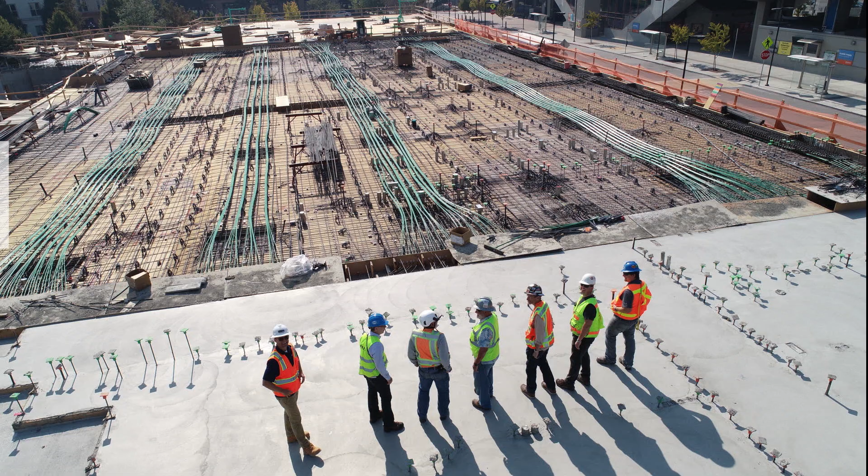So today we'll start out with a little bit of review as usual, but we'll review the general high-level concepts of quantity takeoff as we've talked before, and then we're going to dive into quantity development for pipe most specifically, and we'll talk a little more quickly, a little more high level about Softcraft and their basis. So they kind of tie back into everything in reality.

So review: the process of converting drawings, specs, and lists into quantities is also called quantity takeoff, material takeoff, which is the quantity development acronyms. The quantities represent material, but they also represent installation activities, and they very well may represent several activities at one time, as we talked about the sheetrock installation, the tape and float, the texture, and the paint. One quantity can represent all four of those activities.

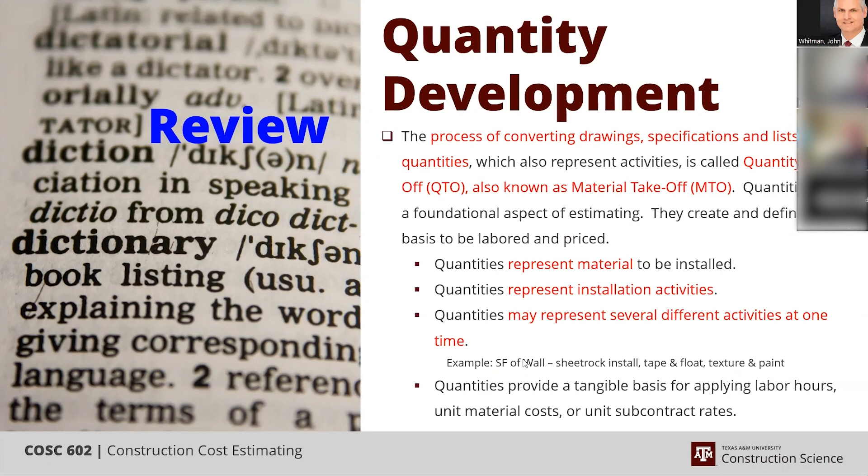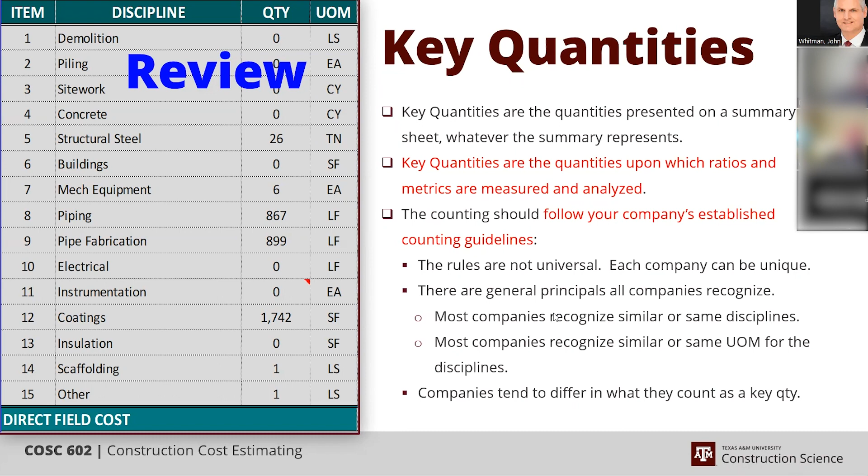Key quantities are not just the accumulation of the quantities, but they're specific quantities, and they're important to know, define, and follow because they establish the basis of ratios and metrics by which you measure and analyze your estimates at a high level. And it's important to know your company's guidelines because many companies vary in what their definition is.

Today, again, we're going to talk about piping, but that means piping, not tubing. Tubing is not included in the key quantity of piping.

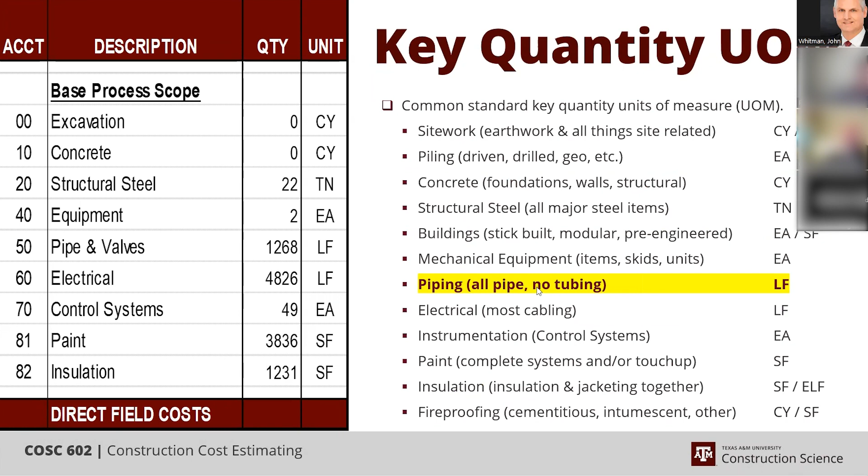Allowances. Now, we know that whenever we calculate our quantities off the drawings or pull it out of a model, those quantities are neat. They represent the actual intended final product, but we know that reality always changes that slightly. We've talked about it, forms bow, and we pull cable beyond the tie point and make sure there's slack in there, and we cut off and drop some on the ground to when we get the exact length we need. So there are practices of assigning allowances to the quantities to account for various things.

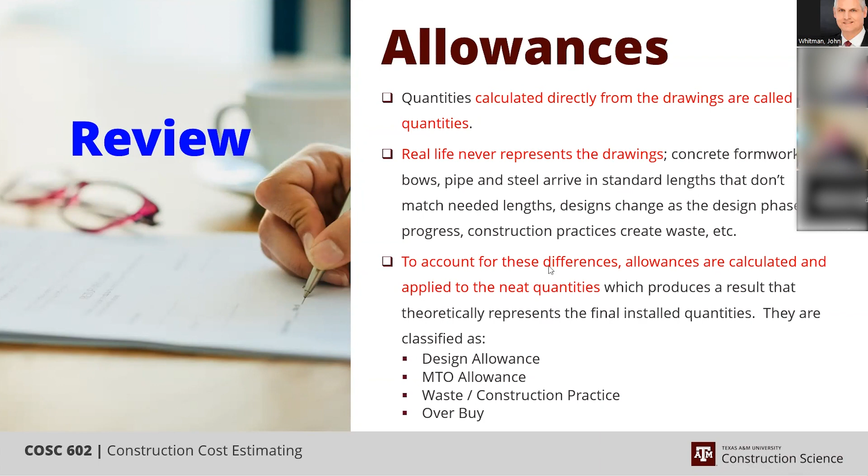Maybe it's just a design change by engineering, even on a piece of equipment. So design allowance is something we need to align with our engineering counterparts because they know what the potential change is for a particular piece of equipment or concept.

The MTO allowance, on the other hand, really reflects the phase or the FEL phase that you're working in, because the earlier you are in the process, the less everything's defined, and engineering's guessing, and everybody is guessing more and more as you move backwards in the design process.

But then, in addition to that, you have the impact of who is actually performing the takeoff, the time that they're allowed to quantify those items, and the methods and tools they use to generate it. So as the experience drops, as time is squeezed, and as the tool becomes more conceptual, that too will impact your MTO allowance, which is actually you're trying to define what you think the gaps may be, how accurate you think they took off, what's actually there. So the FEL phase will establish a level of development, and then these other aspects are trying to quantify how well that level of development was addressed.

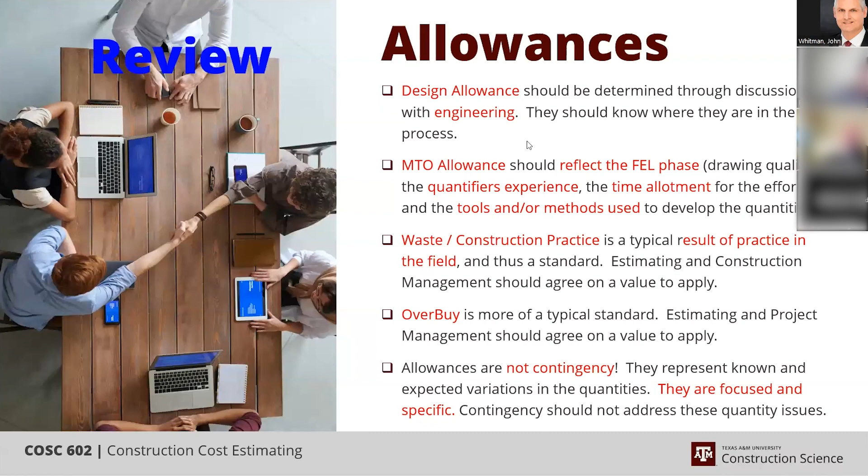So these are specific focused allowances placed on particular items that are deep, deep in the DFC development. And so even though they're contingency-like in their essence, they're not contingency, but you also don't want to put contingency over the top of everything to account for these items because they're already accounted for. The reason they're not considered contingency is because contingencies are applied to the whole project at a very high level. It's very generic - you're trying to define contingency topics, but you're not at this level of detail whenever you're applying it and calculating. While these are very specific, they have specific purposes and they're being applied at the granular activity or line item level. So they do vary.

So what we are going to talk about today is piping, and the key quantity for piping is lineal feet. So it's important that as you set it up, the pipe gets that lineal foot unit of measure, and then everything else that you add into the piping...

MTO does not. So you could put LF period, you could put FT, you could put each, you could put lump sum, you could put lot. There's many other things you could use that would signify what the unit of measure is that the quantity is based in,

but it needs to be something other than lineal feet so it will not roll up. So what all am I talking about that's included with the pipe? You have the pipe itself, whether it's straight run or spool. And then you have what we call the fitting mix, which is flanges and fittings.

Now the flanges are flanges. They kind of stand alone, but the fittings could be elbows, T's, Y's, crosses. They could be 45-degree elbows. They could be 90-degree elbows. They could be reducers. And if anybody wonders about increasers, an increaser just doesn't exist because you just turn the reducer in the reverse direction. But rarely does anybody go from small to large. It's normally reduced, therefore they're called reducers.

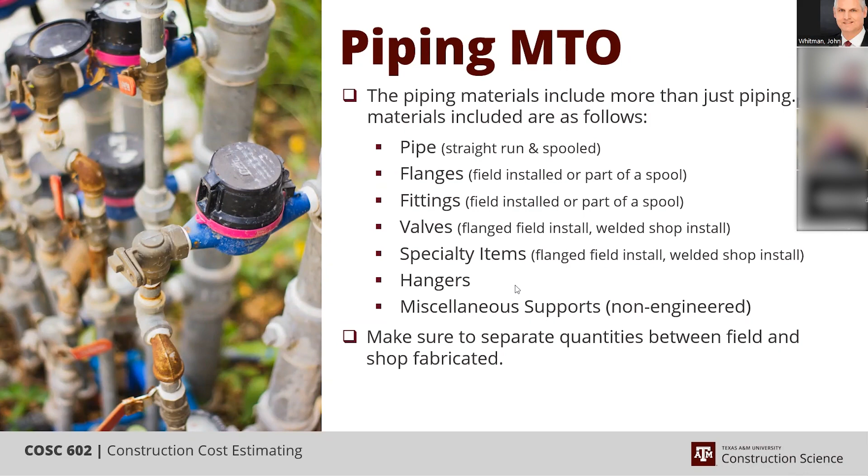I just wanted to ask - what is a spool again? What we're looking at, a spool right there in that picture - is that it? Okay, it's like a section of the pipe. Can y'all still see that? My red line window around it is not visible. A spool can also be a double flange piece that you would roll out.

The spool piece could be double flanged, so you can roll it out of the way with a pipe, especially in a decoke unit. So you'd have a flange on each end? Yeah, so you can unbolt it and roll it out of the way when you decoke a unit to keep it from plugging off.

Sure. I mean, a spool can have no flanges on it, or a spool can have flanges on every connection. It just depends on what the design basis is — what you need it for.

Usually, if it's pipe to pipe, it's welded, but if it's pipe to a piece of equipment, it's flanged. However, if you have a piece that needs to be removed periodically, and the engineers know that as they're designing it, they'll put a flange on each end of that particular spool, whatever the design length is, so that it can be removed and access can be granted.

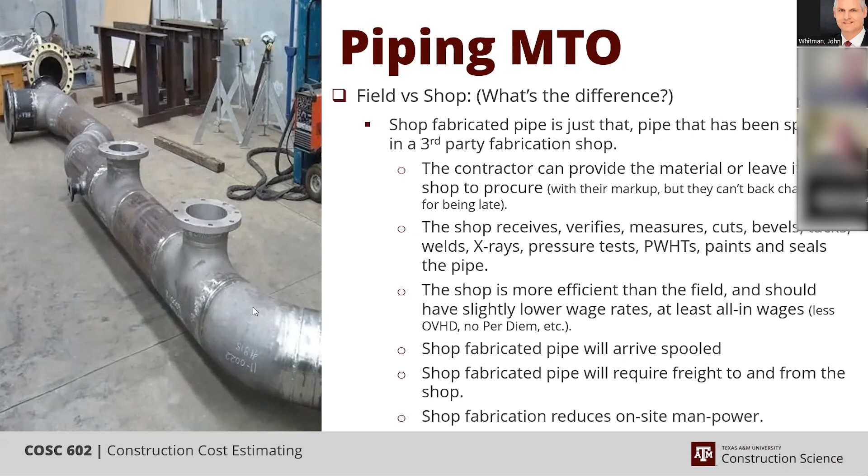The difference between the two is noticeable when it comes to cost, because if they cut them in properly in the shop, then it's just the cost of another weld and a small piece of material. Usually it'll be like a sockolet with a nipple on top of it and a small flange, and you're done.

On the other hand, if it gets shipped and they find out in the field that it's not there, they've got to do all that in the field. So now you've got the higher wage rates, with the per diems, you've got the less efficiency. It will literally change your pressure testing costs from 5 or 6% to about 15% of all your pipe, so it becomes a notable adder if you can't get them fabricated in the shop properly.

But the shop is only going to fabricate whatever is on the drawings. And that goes back to what engineering designs—sometimes engineering can see it in the models and sometimes they can't. So you just have to have faith. You have to figure out how much faith you have in the quantities that you've received and the designs that you have as you start trying to plan that out.

Professor Whitman, how would you account for storage? So if you got a vendor that's making pipe and they store it on site, they're going to charge a storage fee. Would you count that miscellaneous, or just indirect field cost?

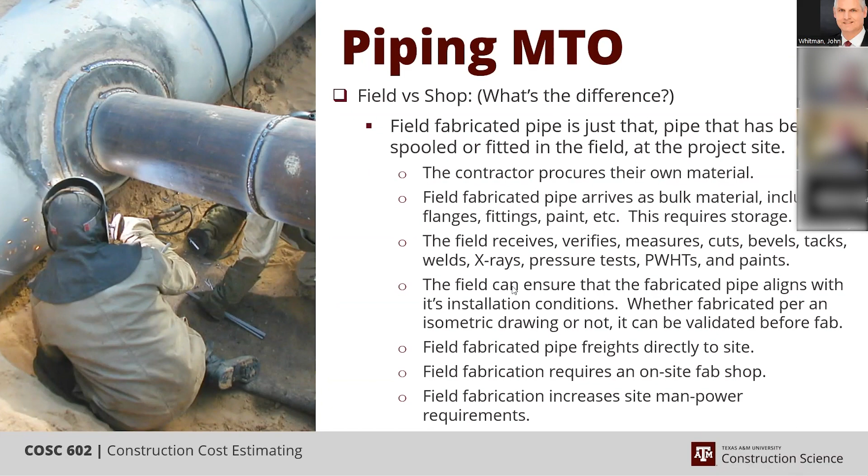Did that answer your question, plus some? Awesome, think we got it. All right.

So moving on, now MTOs. We talked about what's in the pipe, and the two approaches to fabricating the pipe before you install it. Where does the MTO come from? Which is the primary focus of this particular module. Well, it can come from 4 different locations. One, it's engineering provided - the engineers build a 3D model, much like what you see here. This is a snapshot of a smart plant.

And when they're finished, they will drop the quantities out. They'll download it and send it to you in a format that your company has predetermined as the procedure. Then the estimating system knows how to read that, and the estimators know how to process it.

Another option is to model it on a more conceptual basis. In Smart Plant 3D, they're actually building the plant in that, and it's progressing as you work through the FEL stages. If you're early and don't have the time to do that, there are some other options that are more conceptual, but actually have the ability to feed into Smart Plant.

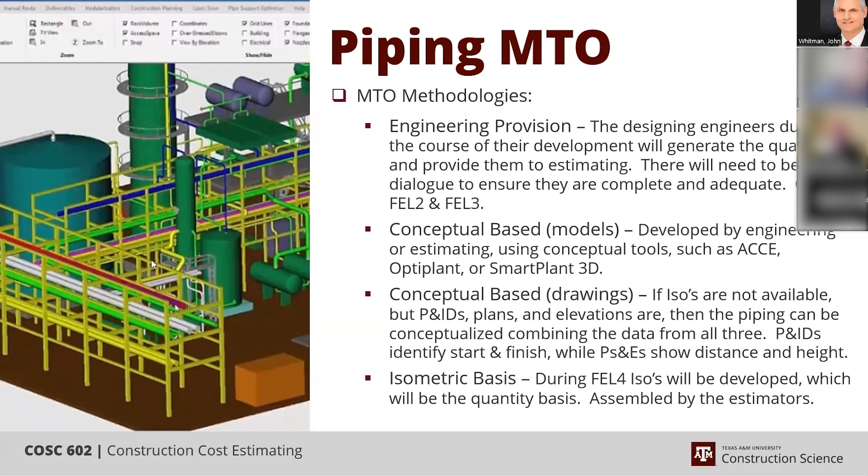Before I dive into that, let me slow down for a second. Let's not forget demolition of pipe. You have to quantify your demolition as well. But demolition usually requires a field survey. You need to walk the field and find out what's there before you can figure out what to remove and how to remove it.

Unless you're planning on reusing the pipe or reusing the valves and everything in there, you can literally blow and go as you're removing that pipe. You can go in there, cut it into manageable pieces, yank it out, and drop it in a bin. You don't even have to remove the valves, flanges, or insulation. Just cut it and get it out as fast as you can.

If there's no intention of reusing anything... but as you start to say, well, we're going to reuse this or try to salvage that, you might become a little more strategic in where and how you cut it, or unbolt some things to get it apart. But if you use a saw that can cut the pipe, you can cut it up and get it out pretty quickly, at a fraction of what it takes to install it.

Because you don't have to torque the bolts, you don't have to pressure test anything. You're just cutting and going. So as fast as you can cut it, rig it, and pull it out safely, that's how fast you can go. And if you do salvage some of the stuff, or maybe you're scrapping it so you can get money for just the steel, what it's worth, you might strip off the insulation after you've pulled it out of the rack, so people aren't having to work at height.

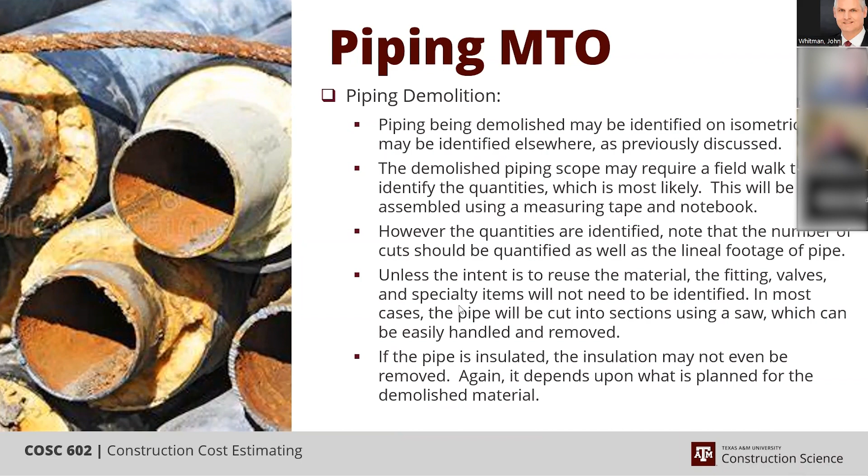There's four types of pipe before we get into the actual spools. Configured pipe is the most complicated. You can see here a representation of what configured pipe looks like. You've got elbows, T's, flanges, reducers, couplings, everything that's required - we call it spaghetti pipe. This is what it will look like in your process area. If you look back at this top picture, you can see there's a lot going on in that back process area.

But as you move out into the pipe rack, it starts straightening out, and you don't have a lot of elbows and fittings. You have a few, but not too many. Then as you move down into your pipe lines, there's almost no fittings at all. You've got elbows here, and other than that, it's just running for long distances with very little of anything other than just the pipe running.

Then there's a transition, usually somewhere in here, where the pipe will become a little bit more configured, but it's still straighter than when you're in the dead center of the process area. So you have configured pipe, interconnecting pipe, pipe rack pipe, and then pipeline pipe.

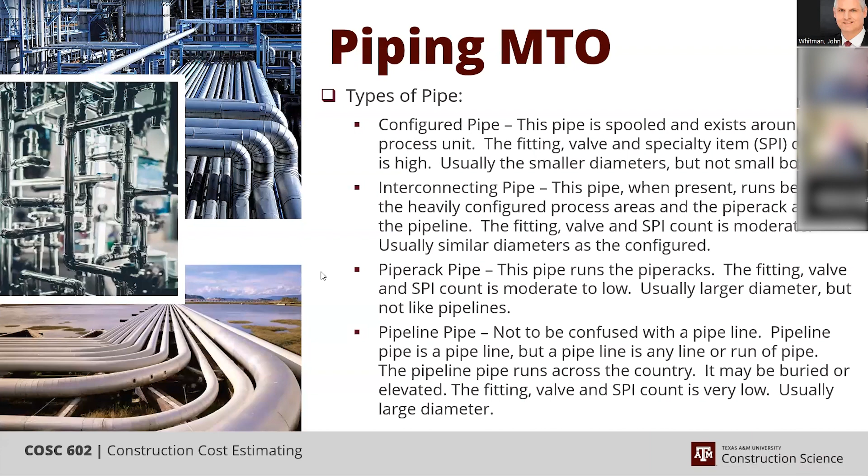Would you take it off any different if it was in a module?

No, the difference would be - what I'm talking about is we want to quantify the pipe that's quantified. That's there, one way or the other. We just want to know what the pipe is.

Now, what would be different is the labor. Exactly. Because going back to what I was saying earlier, when you're in a module fabrication yard, it's like fabricating shop pipe versus field pipe. Module fabrication is much more efficient than field because of the same reasons.

So normally, it's not a hard, fast rule, but 75 to 90% of what it takes in the field to install in a module. So if you've got 1,000 feet, 1,000 hours of pipe in the field, might be 900 in the pipe shop. Well, the pipe shop's gonna be closer to the 70, and the module may be closer to 85, 90.

But there's gonna be efficiency gain there. So that's where that will make a difference. But quantifying it will be exactly the same.

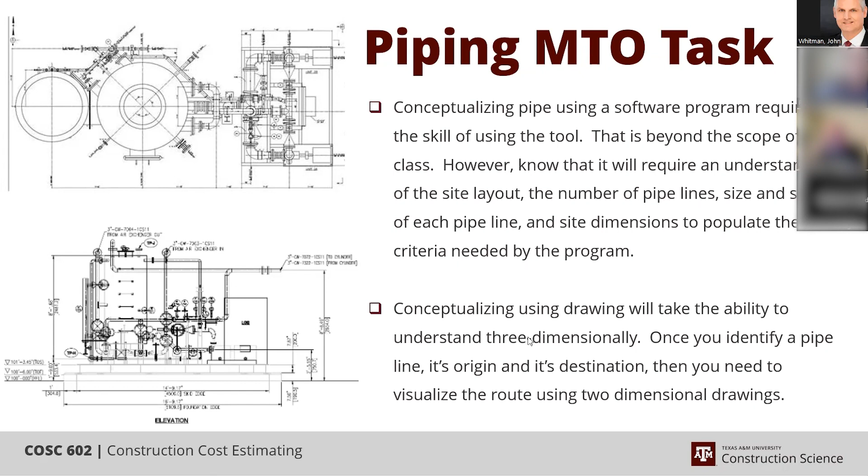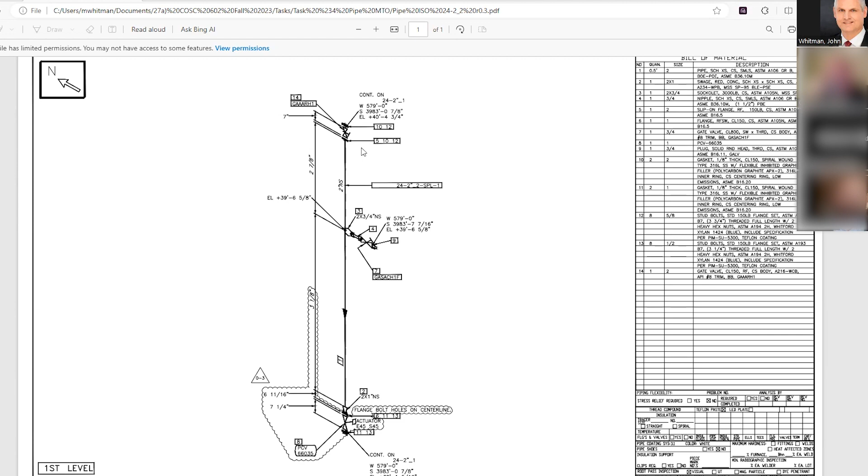There are a few items, such as the hanger, the support I mentioned before when we were in the previous one, this eye rod and support, and the specialty item — those items are going to be field installed because they're connected to something; they're not welded to the piece of pipe. So anything that's welded to the piece of pipe, spool, will be done in the shop. Anything that's bolted or connected will be installed in the field. That's your litmus test.

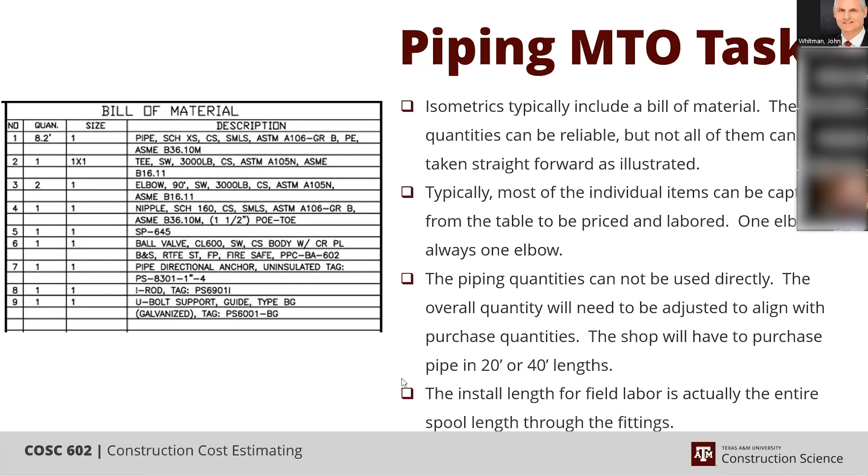Is everybody reasonably comfortable with this? Professor Richmond: Yes, I am totally unfamiliar with this kind of drawings. Would you recommend any online resources or books I can go through before? I want to picture myself, at least get a picture of what I'm quantifying. So do you recommend any resources?

I was looking at that earlier today because I have another request for the exact same thing. I went back to some of the books that I have, and the ones that I thought might help, I don't have anymore. I don't remember what they are.

Professor Whitman: I don't know if it would help, but there's process operator books that teach how to read P&IDs and PFDs, some ISOs. That's an excellent source. Do you know the name of it? There's thousands of them, it's pretty generic. Process operator, P&IDs. I honestly would just Google it if y'all don't know how.

I actually do this for a living, so I know what I'm talking about. Just Google process - P&ID stands for process and instrumentation diagram, so you can Google that. PFD stands for process flow diagram, so you can Google that, and you'll find lots of stuff to read about it. And then ISO is isometrics.

I have one other book that I have, I don't have it in front of me at the moment, I'm looking for it. I'll look through it because I think it talks about piping, but I don't know if it really talks about isometrics. I've reached back to the department and asked if we have any type of tutorial we can offer up for everybody interested, but I haven't heard back yet.

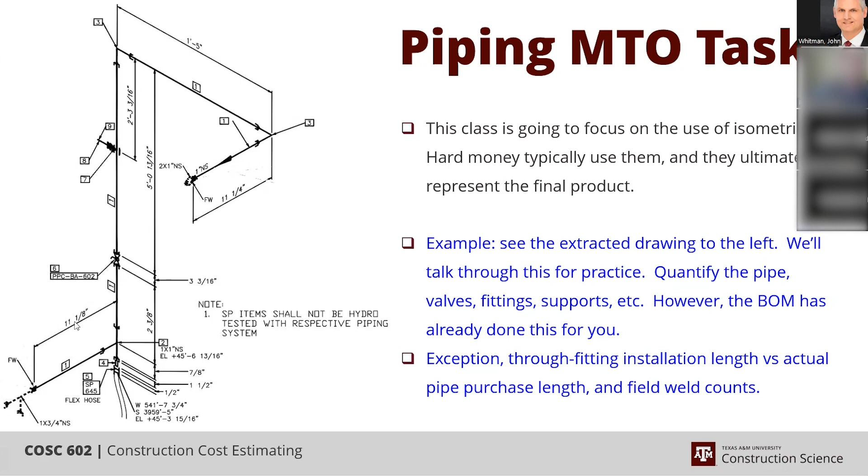Stephen is also a good source. He has volunteered himself, so I'll go ahead and put that out there, since he likes to brag about it so much.

No, I'm just happy I'm not lost anymore. Just happy. Yeah, no, we got it. You mentioned it a time or two.

To cap off today's discussion, when we talk about soft craft in our jobs, we're talking about painting, insulation, fireproofing, and scaffolding. Those are the soft craft trades. Even though they're different, usually the same companies that do one will do the other. There are a few companies that will do paint, insulation, and scaffolding but won't do fireproofing, or they do nothing but fireproofing. A lot of them out there, like Knight, Brand, Safway, Brock, will do paint, insulation, fireproofing, and scaffolding.

So how this translates back to the piping we've discussed: everything is going to need paint touch up to some degree - your equipment, your steel, and your pipe. But your pipe more than anything, because as you're installing your pre-painted pipe, you're scratching the heck out of it, and you've got to go back and touch it up. Equipment gets beat up too, but not quite as bad. Steel gets beat up, but not as bad as pipe, because it's one of the first things to go up. But when you touch up steel, you're actually touching up with Galvalume or something similar - touching up the galvanized coating, not a painting system, but it's still part of your touch up.

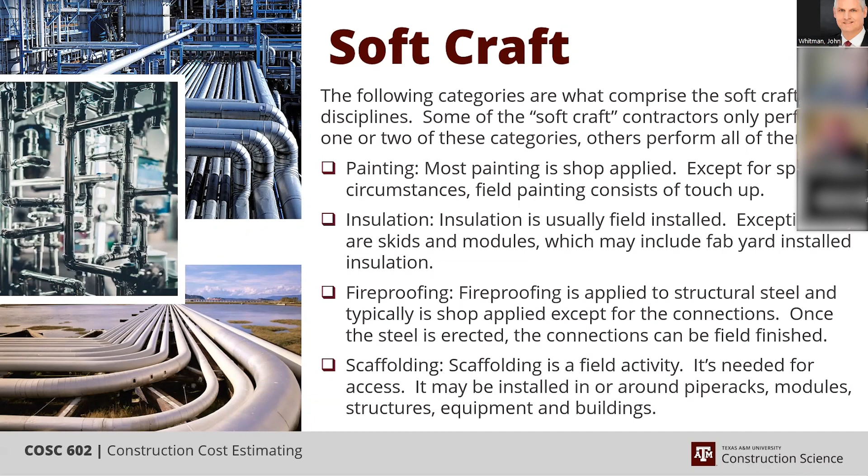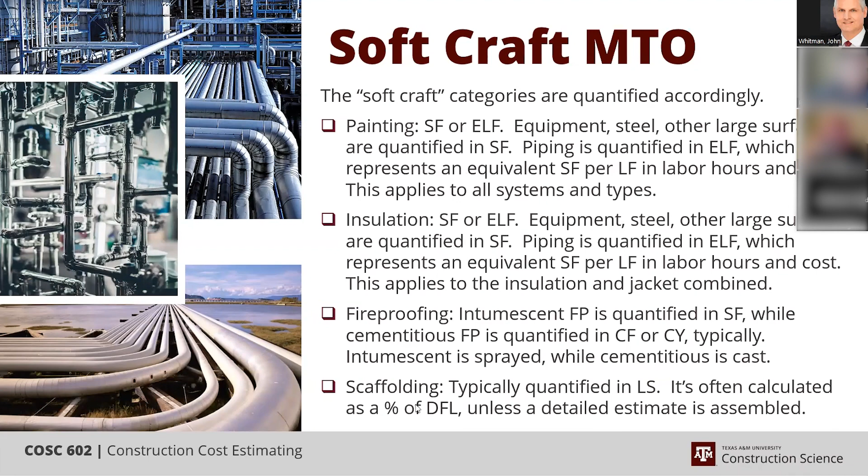All right, so: square foot equivalent lineal foot for paint and insulation. Fireproofing is square foot for intumescent, and cubic feet or cubic yards for cementitious. And scaffolding is a percentage of your direct field labor, unless you do a very detailed buildup.

All right, so next week - today was the steel, next week is the building interiors, and the week after is going to be the piping takeoff. So at that point, we will end today's discussion.